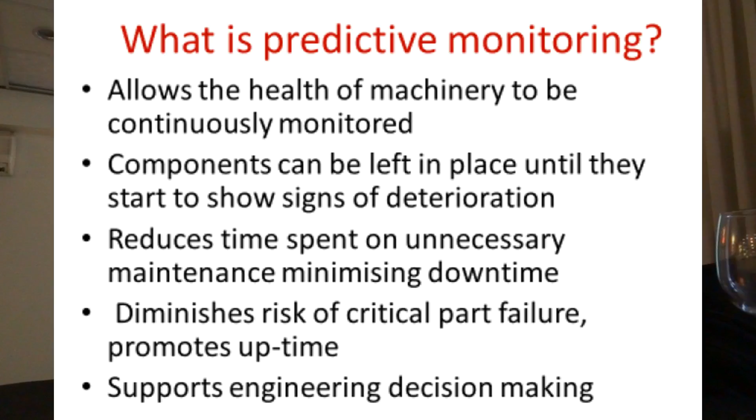What is predictive monitoring? It allows the health of machinery to be continuously monitored. Components can be left in place until they start to show signs of deterioration. It reduces time spent on unnecessary maintenance, minimising downtime. That's a biggie there. It diminishes the risk of critical part failure.

It promotes uptime, and I think the most important part of this slide, it supports engineering decision making. As we move forward, engineers are becoming the front line. They are no longer just the guys that go out and maintain the plant. It's their responsibility to make decisions, and without the information, those decisions are diminished.

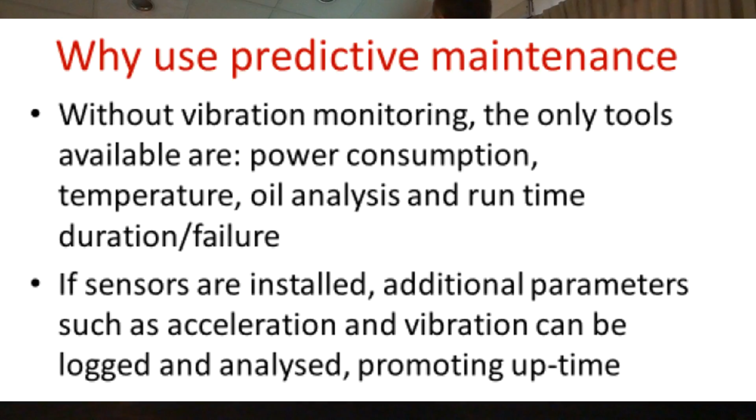Why use predictive maintenance? Without vibration monitoring, the only tools available are power consumption, temperature, oil analysis, and runtime duration failure. When I say runtime duration failure, there's many ways of carving that up. In the UK, we class that as firefighting. Basically, you run the machinery till it breaks, and then everybody runs around trying to get the parts and shouts and screams at each other.

Temperature on the failure curve is way above what a vibration sensor will be telling you. Power consumption and oil, again in my opinion, these are further on the failure curve than vibration monitoring. If the sensors are installed, additional parameters such as acceleration and vibration can be logged and analysed, promoting uptime.

With sensors, whoever manufactures them, there's two types. There is AC, which is going to give you analysis where you're looking at particular bearing failure, whether that be inner race, outer race, one of the ball springs pitted, or you have vibration. In my history of coming back and forth to Israel and working with the guys at Monitran, I understand that vibration is the big seller in Israel. It's a very understandable concept.

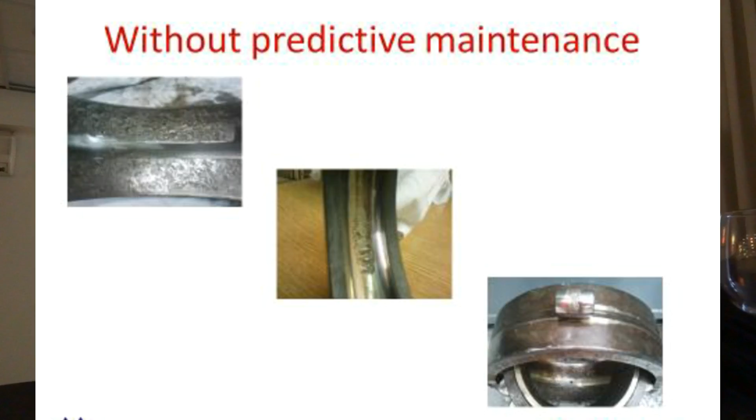Without predictive maintenance, I'm not sure if things come out. Basically, these are three cutaways of bearing failures. You can see the races are scored. I would guess that's probably because of lack of lubrication.

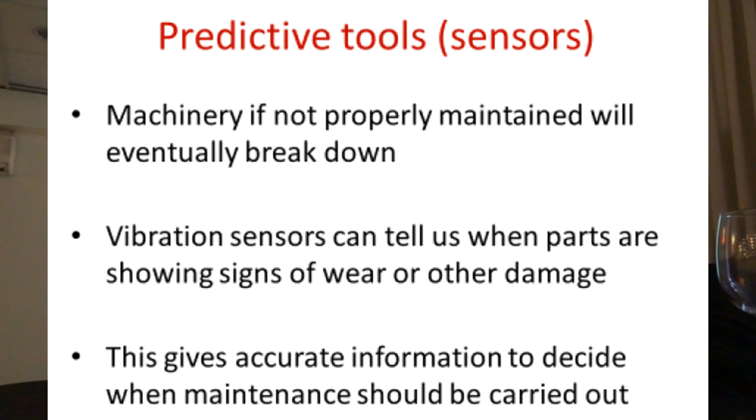Machinery, if not properly maintained, will eventually break down. It's a fact, as engineers we all have to live with that. Vibration sensors can tell us when parts are showing signs of wear and other damage. This gives accurate information to decide when maintenance should be carried out.

Again, this is emphasising the same point. With the sensor, it's giving the information, it's going to show us trends, it's going to show us spikes. And as engineers, it's our job to interrogate the information coming back to us. But it is all about information.

Not showing my age, but when I was an apprentice, my chief engineer basically used to take me by the hand and we'd put our hand on motors. He would then put a screwdriver and hold it up to his ear, and somehow magically he would tell me that the bearings are failing. I'm not sure he was true, but that's what we did. Chief engineers, certainly in the UK, were men held in high esteem.

They are now, but there also needs to be people that can produce charts, produce graphs, produce reasons, and this all falls back - this is a tree all the way coming back to vibration monitoring.

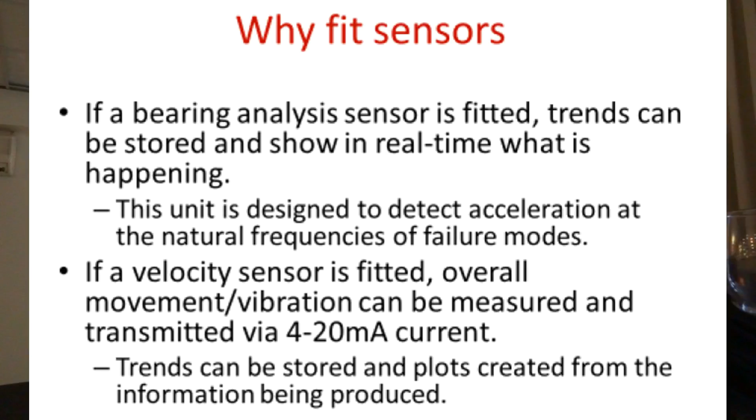Why fit sensors? Well, it's starting to be a theme here. If a bearing analysis sensor is fitted, trends can be stored and shown in real time what is happening. I mean, basically what I'm saying there is, if we put a sensor and start analysing the information that's coming back, there's a term.

It's an old term, it's an FFT algorithm. It was developed back in the 50s, 60s, and it's looking at trends in a sinusoidal wave. I don't want to go too much into that, but basically with a package you can start seeing real analysis on your bearings, and that's going to be done through an AC signal.

Going on here, this unit is designed to detect acceleration at the natural frequency of failures. We'll go on further in the presentation.

If a velocity sensor is fitted, overall movement vibration can be measured and transmitted via 4 to 20 milliamp current. Trends can be stored, plots can be created from the information being produced. And I think that's fairly self-explanatory here.

We all work in this world of 4 to 20 milliamp. Everything's 4 to 20 milliamp. Everything has a current, we can literally feed it in anywhere. You do not need additional equipment. All of our plants have 4 to 20 milliamp. It needs a 24 volt DC supply, which we have available. You are buying a sensor and fitting it on your equipment.

You are not going to have to go out and get some sort of data acquisitioner. It's there, it gives you information, it empowers your engineers.

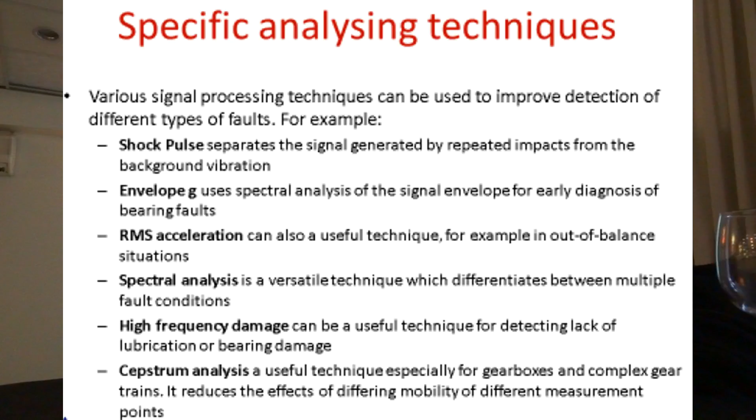Spectral analysis is a versatile technique which differentiates between multiple fault conditions. High frequency damage can be a useful technique for detecting lack of lubrication or bearing damage. There's a theme coming here. Cepstrum analysis is a useful technique, especially for gearboxes and complex gear trains. It reduces the effects of differing mobility of different measurement points. Again, you could be using one or two, you could be using all of them.

These are techniques that we can employ, but without the sensor, none of this becomes available.

Generic AC sensors. Again, an AC sensor is going to give you a voltage output, and AC sensors are fitted to some form of rotating machinery, such as a felt roll in a paper machine, or a gearbox in a wind turbine.

Our business dictates that wind turbines have become the default setting for the globe. Every country does wind turbines, whether they're producing energy or not. In the UK, for some unknown reason, we decide to put them in the sea. I don't know why, but we put them in the sea. The amount of energy, the amount of money it costs, we're never going to recoup anything, but we do tick the green box. And they have our sensors, bless them.

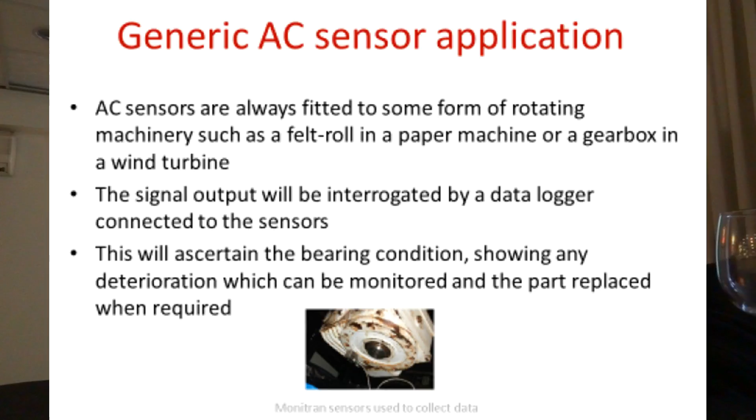Every country has to go down this road, it's where it is. Signal output will be interrogated by a data logger connected to the sensor. This will ascertain the bearing condition, showing any deterioration which can be monitored and the parts replaced when required. There's the tag - parts replaced when required. You're in charge, you're making the decisions.

Monday, and we've spoken to a number of people, and the ongoing theme is trying to analyse pumps - what they're doing. Are they cavitating? Are they blocking? Are the bearings failing? Is the belt coming off? Are the impellers coming loose? I don't know, but without some form of monitoring, nobody else knows.

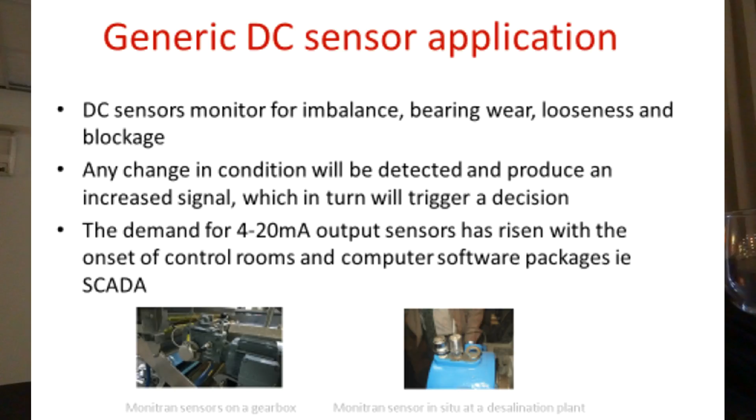The demand for 4 to 20 milliamp output sensors has risen with the onset of control rooms and computer software packages, i.e. SCADA. I make an assumption that SCADA's here in Israel because it's pretty much everywhere else. And again, two very typical installations on screen.

A little bit about the sensors - we manufacture both piezoelectric and piezo-resistive. To expand on that: piezoelectric are a standard sensor, you're going to get them - these are the ones that our friends at Monitran mainly sell. They're a general sensor, you're going to put them everywhere. They start at around 2 hertz and go up to 1,000 hertz, so they're going to cope with everything you've got.

Piezo resistive, slightly different - they'll go down to DC, so from 0 to 500 hertz. Very slow moving equipment, you'll be able to get some feedback from them. It's horses for courses - that may not work here. It's whatever sensor for whatever application.